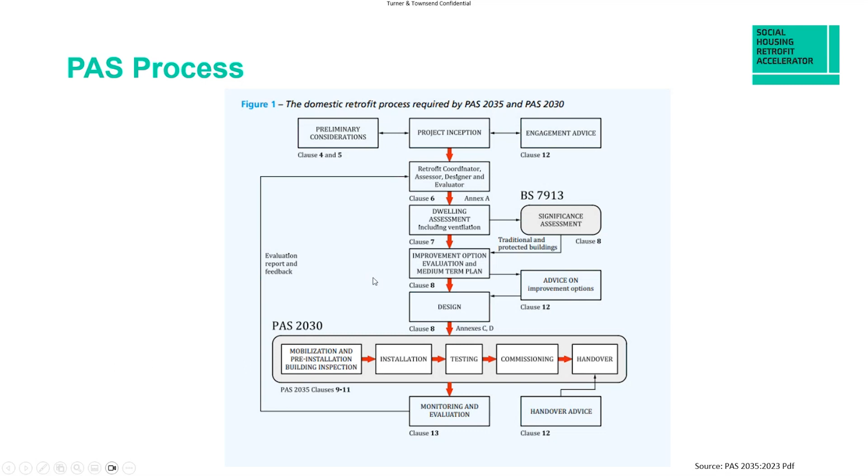Okay, so implications. The latest update for PAS 2035 - I should mention there's a bit of confusion sometimes. PAS 2035, we're not talking about the date 2035 or 2030. They just happen to be the reference numbers assigned to these particular PAS documents, even though when you start talking about PAS 2035, 2023, it starts sounding confusing. The 2035 is basically the risk management specification for domestic retrofit.

Anyway, so there's a few slides with a summary of changes - the updates made between PAS 2035 previous versions, which was originally 2019 with various iterative improvements, and the 2023 version is a kind of new version.

So the guidance clauses have been updated to reflect national policy changes and emphasise the role of PAS 2035 in terms of consumer protection. That's a key point to stress.

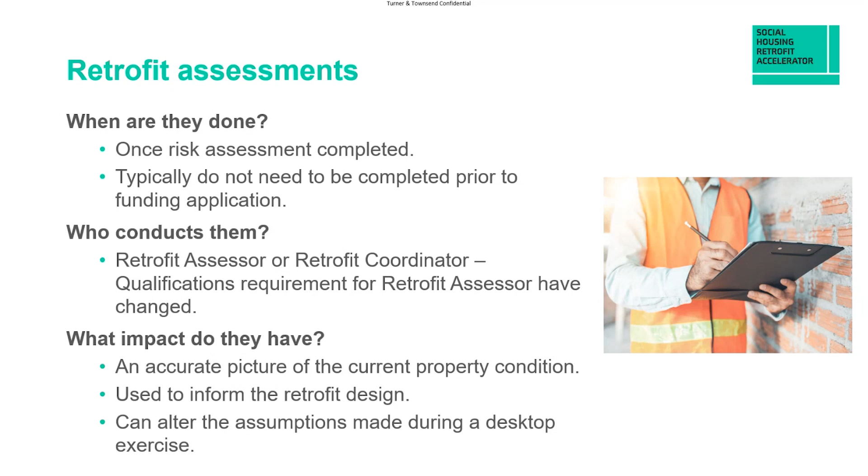So coming on to retrofit design, here we're basically looking at what the retrofit coordinator really should be preparing: a sort of summary report of improvement options, identifying a recommended package of the appropriate energy efficiency measures, which go on to form the basis of the medium-term improvement plan, and that would be for each dwelling.

The whole dwelling scope for improvement in energy efficiency for each dwelling should be identified, even if only limited improvements can be undertaken in the short term. So the medium-term improvement plan should be prepared, as I said before, for each dwelling. The retrofit coordinator will also identify any heritage significance, so listed buildings or conservation areas, to inform the design. There's another British standard relating to the conservation of historic buildings, which again is referenced in the PAS 2035 document.

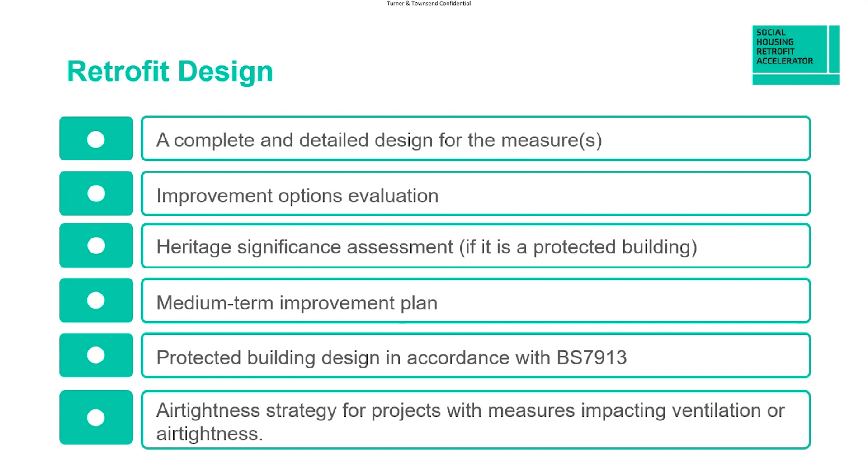And then just thinking about the air tightness strategy and ventilation assessments, basically wherever you're having any measures which are impacting ventilation and air tightness on the building fabric, you need to be looking at additional ventilation for that dwelling. I'll come on to that a little bit later, actually. There's basically a few different circumstances which would obviously indicate that you need to be looking at redesigning the ventilation for different buildings.

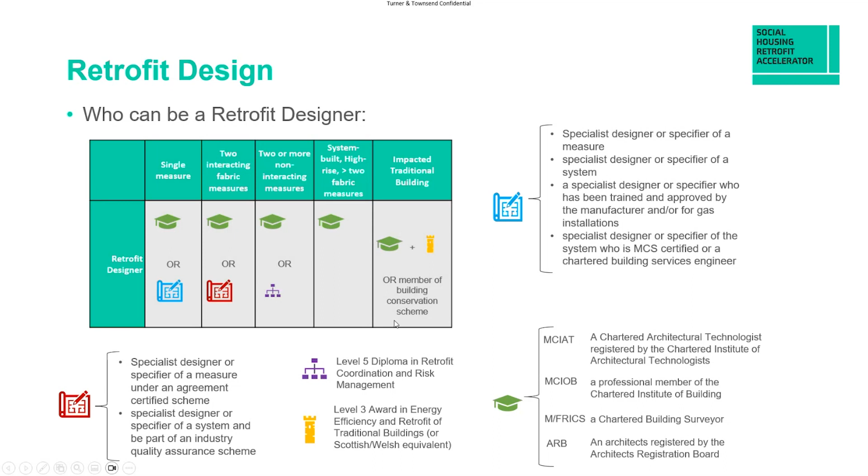So what do we need to include within the design for retrofit? The design document should include the measure design, overall and site-specific construction details, ventilation design and strategy. As I said, this needs to be adequate for the dwelling, but also for the occupancy. Obviously, occupants can change, families can grow, new children will arrive, children will leave. There's all sorts of different scenarios. Generally, you'll be looking at what the occupancy demand is at the time of the retrofit, but with a view to what other possibilities there are.

If it's a 3 or 4 bed house, the likelihood is it will generally be inhabited by a family with several children, and washing and catering and bathing needs associated with that level of occupancy. And therefore the ventilation strategy needs to be able to cope with that. So the intended outcomes: you should be setting out what the project hopes to achieve in terms of improved performance, and that could be the energy performance, so kilowatt hours per square meter per year, and EPC rating, such as the targets for SHDF funding. And how you achieve that could be different depending on the project and property designs and occupancies. And then another point about risk assessment, just defining project risk.

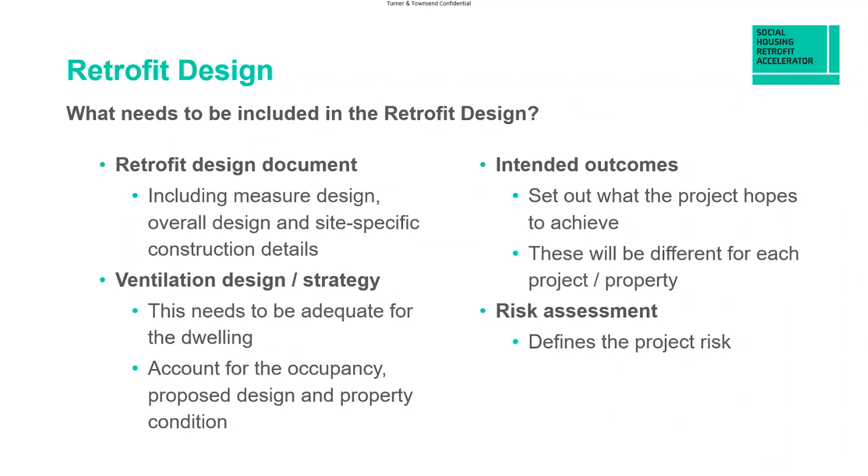And that, if you like, is background ventilation, which is already dispersing moisture in the house. If you start reducing that significantly, then you end up with a buildup of moisture in the house. And you should then be designing a ventilation system which is going to cope with that buildup and ventilate to an adequate level.

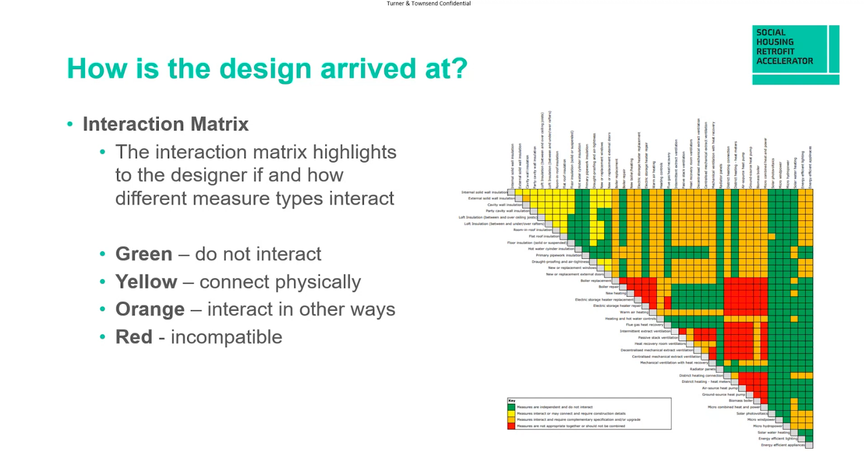They don't interact, so they're fine to install together. Yellow is they might connect physically, orange is they might interact in other ways, and red is the incompatible ones. But quite a useful graphic to refer to.

So just thinking about how we arrive at particular designs. When you're thinking about the design of different measures, if you've got loft insulation, obviously all lofts are not the same, and you have to make considerations about maintaining airflow in lofts, and there are different products around which can be used to help with that. There's a lot of specification and installation instructions with different products, which must be adhered to, in terms of the product manufacturer saying that their products need to be installed in a particular way in order to work properly. So those need to be adhered to.

Same with different systems. So you might have an external wall insulation system, and the installers need to be trained in that system, both from a manufacturer's point of view and from the PAS 2030 perspective as well. And the retrofit coordinator is, as I said before, the overall project manager who needs to really be keeping an eye on all of this so that products and systems are being installed according to the design and manufacturer's specifications.

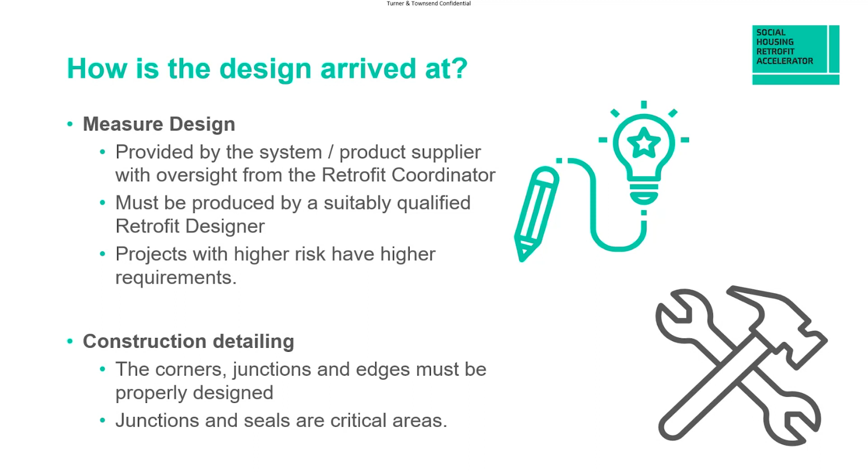So construction details are also very important with retrofit. Where you have corners where walls and roofs and windows and various other elements join, the detailing around those is where you are likely to have what's called a cold bridge, where there's a risk of increased heat loss at those places, and the insulation or design of measures around those points needs to be carefully considered. It says there the junctions and sealing of different elements is critical. So the retrofit designer needs to be very aware of those requirements.

Back to ventilation, why is it important? In all homes, there are pollutants being produced, moisture included, but also VOCs, so volatile organic compounds from furniture, paints, carpets, all sorts of things. They all off-gas various different chemicals just from the way they're produced, and we're trying to avoid a buildup of those. Those aren't good for human health.

And then high levels of moisture and damp in a property not only can lead to mold, but they can produce ideal conditions for mites and different kinds of pests that you wouldn't want. So adequate ventilation reduces the risks from all these things.

So when would we consider designing a new ventilation system? We'd look at the adequacy of the current ventilation system. So is it up to the job? Think about whether the works that we're doing are changing the air tightness, air permeability of that property. And we're considering long-term property objectives as well, and the occupancy, current and potential future.

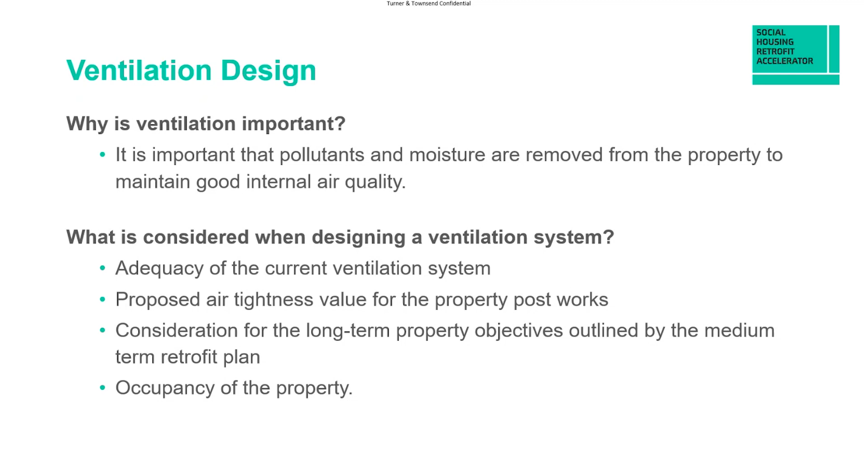New windows, so if you're refitting new double glazed or triple glazed windows, it's likely that the actual mounting of those windows within the wall or within the insulation layer, if you're doing some sort of solid wall insulation, will also have a very much increased air tightness seal to the windows. Floor insulation, so if we're doing underfloor insulation, lifting floorboards or having them sealed from underneath, that will also massively affect the air permeability of a property. Generally, it's got suspended timber floors.